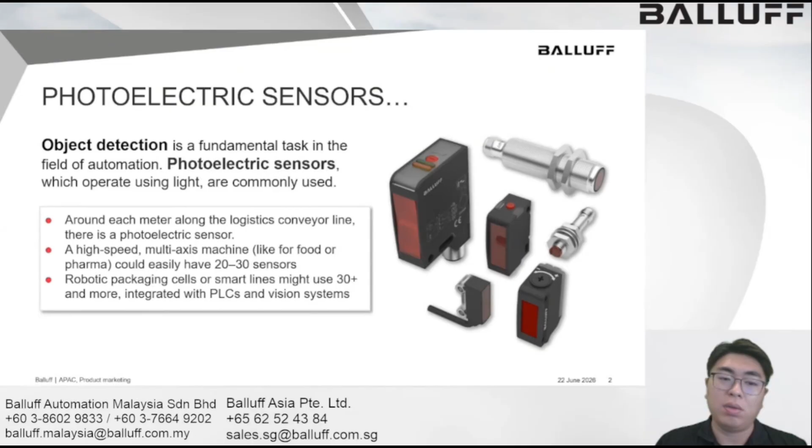With Balluff, the goal is to deliver exactly what the customer needs, but not over specification, while also not compromising on quality. The BOS entry R072K is designed to strike that balance, offering dependable performance while keeping costs under control. This is especially important in applications where many sensors are required and overall system cost becomes a key consideration. Now, let's look at the core strengths of this product.

The BOS R072K delivers four key advantages: wider range, faster response, flexible configuration, and reliable performance. These four aspects are critical for most industrial sensing applications, especially where there are variations in object type, speed, and environment. Let's go into each of these benefits in more detail.

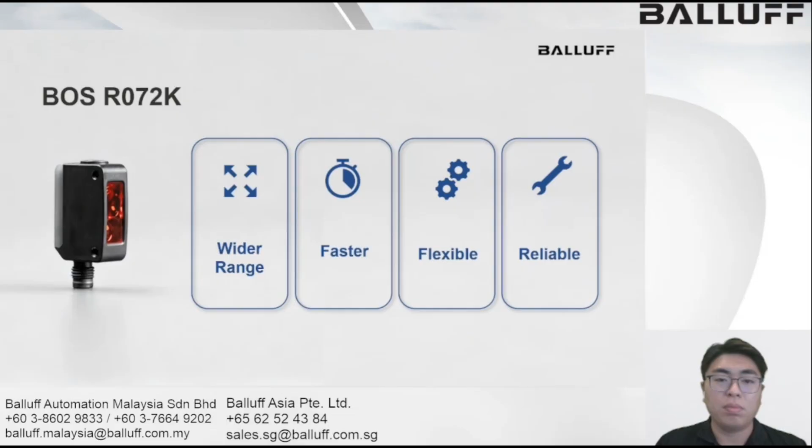One of the key advantages is the extended sensing range of the R072K, especially when detecting dark objects. Dark surfaces typically absorb more light, making them harder to detect for standard photoelectric sensors. With the BOS R072K, we achieve a longer sensing distance compared to many alternatives, which helps reduce misdetection. This means customers can achieve reliable detection without needing to upgrade to a more expensive sensor model. Overall, this improves both performance and cost efficiency in real-time applications.

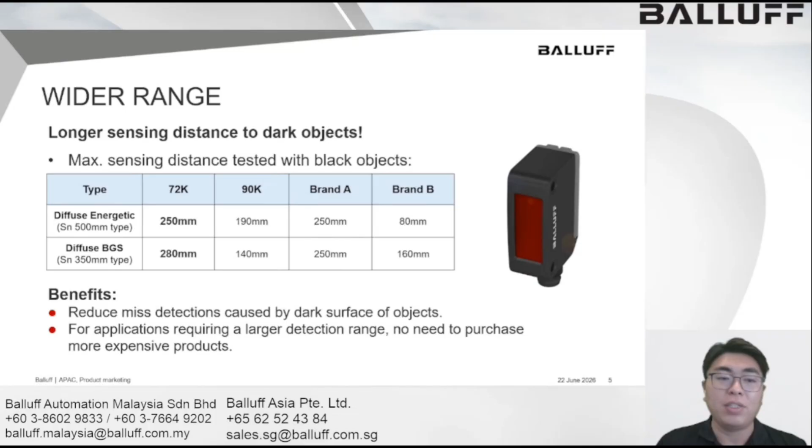Another important improvement is the very small blind zone. In general, the R072K has a blind zone of less than 5 mm. A smaller blind zone means the sensor can detect objects more consistently even when the object position varies slightly. This is especially useful in dynamic environments where objects may not always follow a perfectly fixed path. In addition, the sensor is less affected by factors such as object color, shape, or material. As a result, users can achieve a more stable and predictable detection performance.

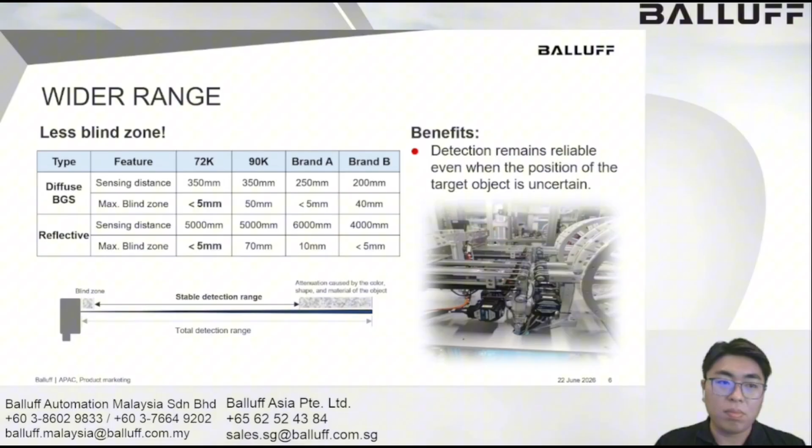Next, the BOS R072K also offers a fast response time of 0.5 milliseconds. This fast switching capability makes it well suited for high-speed applications, such as conveyor systems and automated sorting lines. By ensuring quick detection and response, the sensor helps improve overall production efficiency and reduces errors in fast-moving processes.

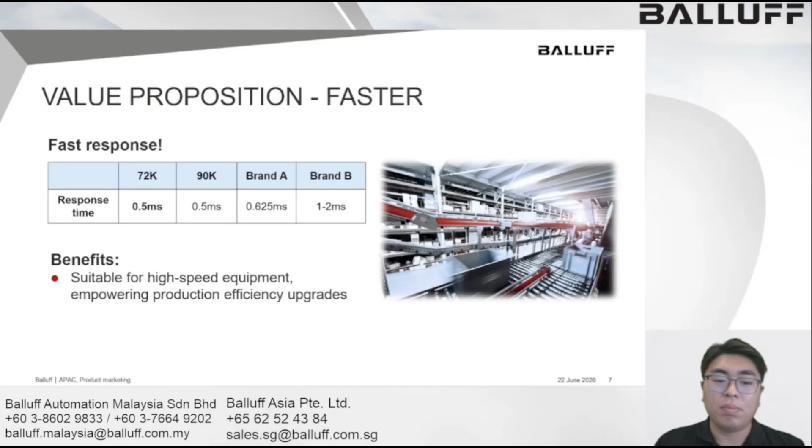In terms of flexibility, the sensor offers multiple connection options, including cable, connectors, and plug variants. This allows users to select the most suitable configuration for their installation requirements. In addition, the availability of infrared light helps reduce the influence of environmental factors, making it suitable for applications involving human interaction.

Different sensing principles are also available, such as the through-beam and diffuse modes, and also the background suppression model. All are quoted at the same price level.

Beyond performance and flexibility, reliability is really where this sensor stands out. It's designed to remain stable even under strong ambient light, up to around 5,000 lux, which is much higher than typical factory lighting systems. So in most real environments, you can expect very consistent detection. It also comes with multiple international certifications, so it's suitable for global projects without additional concerns. Overall, it gives you a very robust, dependable sensing solution.

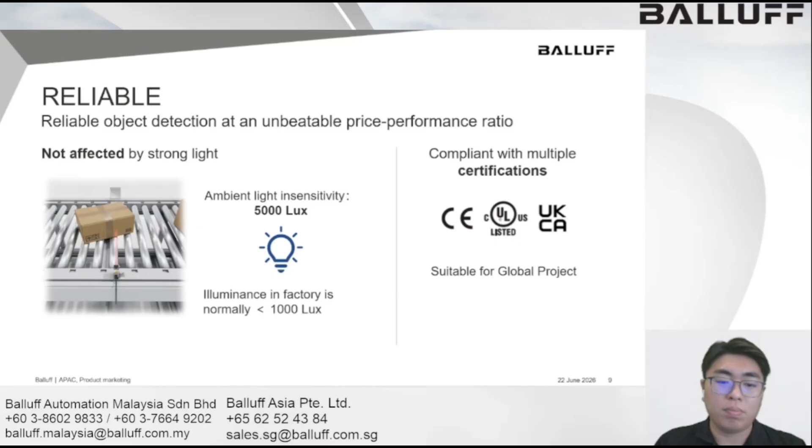Now, we have covered the main benefits. Let's quickly go through the key features of the product. I will focus on the practical aspects that matter for installation and daily usage.

In terms of features, we have a highly visible LED indicator on the back of the sensor: green light for operation stability, and yellow for the output. It's very easy to check the status at a glance. There's also a visible red light option, which makes alignment and setup much easier.

Adjustment is also simple. You only need a potentiometer to adjust the sensitivity, and there's also a NO or NC switch on the back of the sensor. The housing is IP67 rated, so it's suitable for most industrial environments. Mechanically, it's quite straightforward, with standard mounting holes and common connector options, so integration is quite easy.

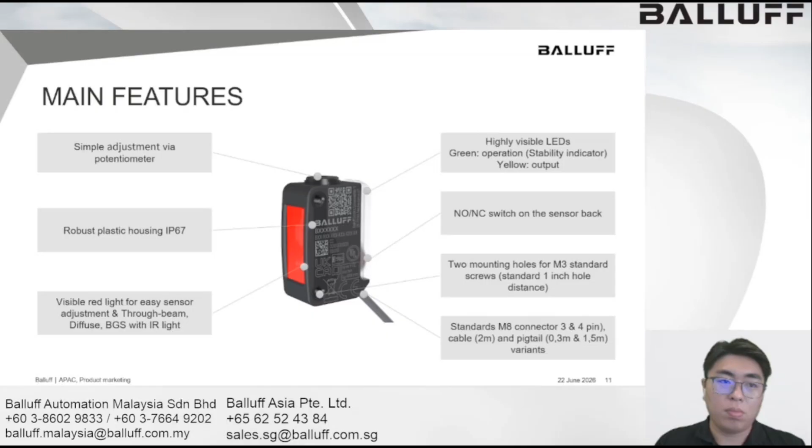From a technical perspective, the BOS R072K supports multiple sensing principles, including through-beam, retro-reflective, diffuse, energetic, and background suppression type. Sensing distance can go up to 20 meters depending on the model, so it covers a wide range of applications. Both PNP and NPN output options with a switching frequency of 1000 Hz are available. It operates within standard industrial voltage and temperature range, and again it comes with global certification. So overall, technically, it's quite flexible and ready for most usage.

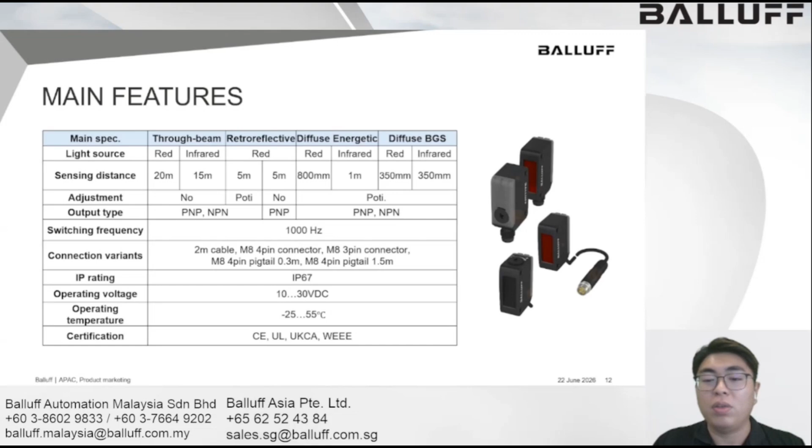Another key point is a wide range of variants. You can choose different sensing types, output options, and connection formats, whether it's a cable, connector, or pigtail. There are also red light and infrared versions depending on your application needs. So essentially, this gives you the flexibility to match the sensor precisely to your system.

In addition to the sensors, we also offer a complete set of accessories. This includes cables, connectors, mounting brackets, and reflectors. So from installation to operation, everything is covered as a complete solution, which simplifies the engineering and deployment.

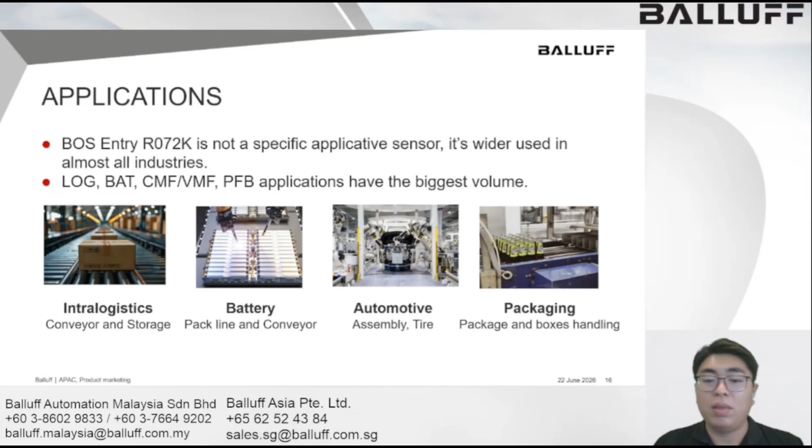Now let's take a look at where this sensor is typically used. The BOS R072K is not limited to a specific application. You will commonly see it used in intralogistics, battery production, automotive, and some packaging industries. These are also areas where sensor volume is very high, so cost performance is especially important for us.

For example, in a conveyor system or material handling system, it's used to detect object presence. Because of its strong performance with dark or angled objects, you reduce misdetection, and with a fast response time, it helps improve overall line efficiency.

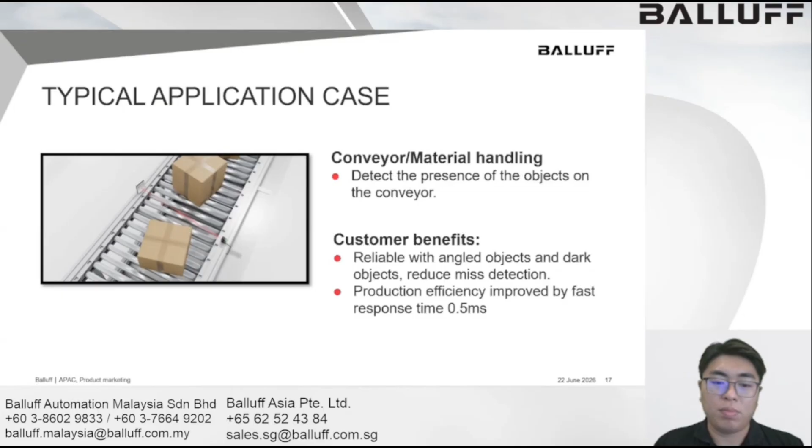In battery production lines, the sensor is used to detect module presence and positioning. Here, detection stability is very critical, especially when the assembly line is in a compact space. The small blind zone helps ensure more stable detection, even when the alignment isn't perfect.

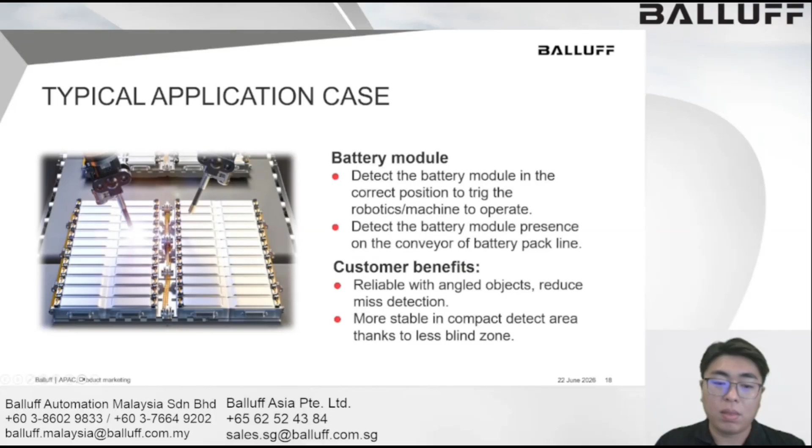Next, in automotive assembly, it's typically used for position detection or presence detection, such as tire detection. With IP67 protection, it will be more stable in harsh environment applications.

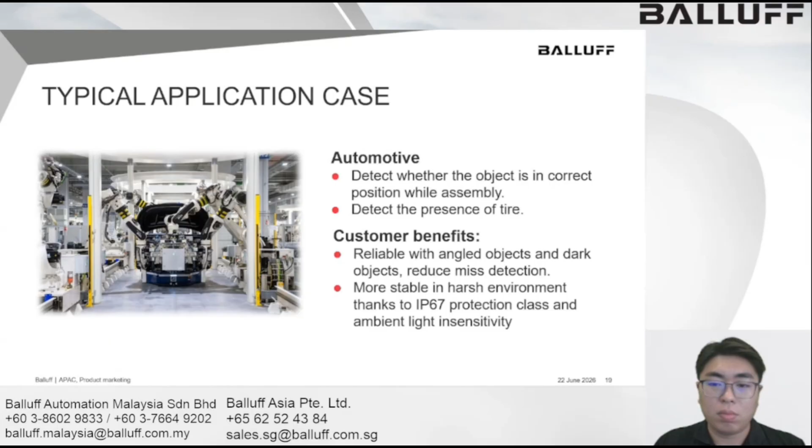Of course, there are also applications where the sensor is not so suitable. For example, in very harsh environments such as high temperature, heavy dust, or strong vibration, it's not recommended. It's also not suitable for welding applications due to heat and spatter, or in washdown environments with frequent high-pressure cleaning. So during selection, these are the most important things to consider.

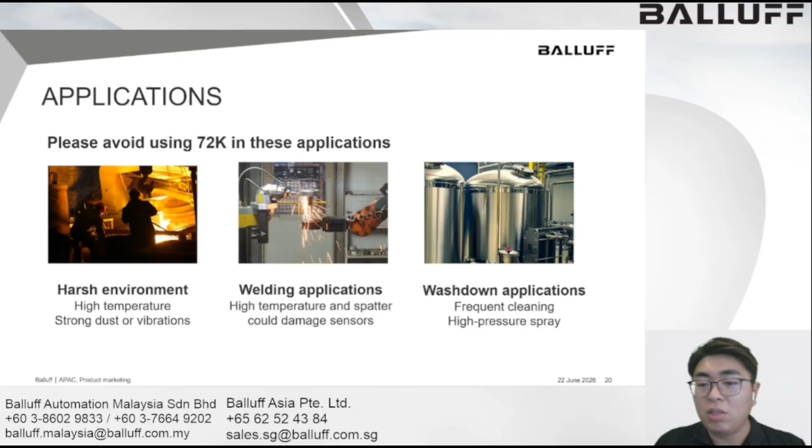Once again, the BOS R072K comes with 4 key advantages: wider range, faster, flexible, and reliable. All these sensors are positioned at an excellent price performance ratio. Hopefully, our product will help you.